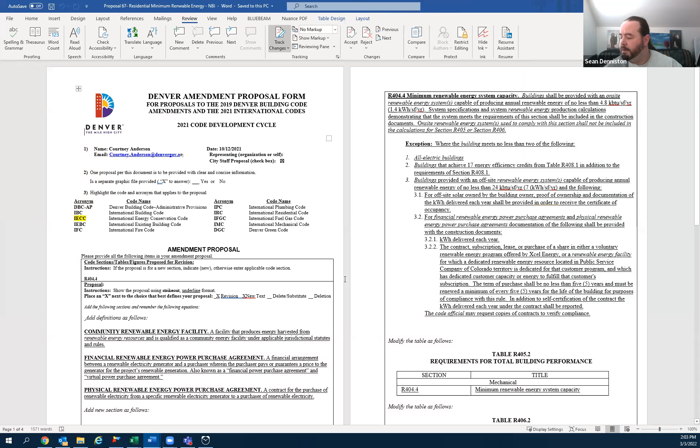And Sean is going to talk about proposal 67. So if you wouldn't mind actually opening that proposal, that might be the best way to do it. All right. So we are having a similar discussion to what we had before. 3 of the big proposals for residential. These are the 3 that we talked about before for commercial. And so hopefully our discussion could be a little bit shorter this time around.

And I wanted to start out by talking about the greenhouse gas emission impact. So this is the minimum renewable energy requirement. This is based on goals that are set and modified through the Denver implementation plan for net zero energy. And it sets a minimum level of on-site renewable energy with an option to do it through off-site instead. The greenhouse gas emissions savings from this would be just over 20%, almost 21% at the level that it's set now. You can see we have the same definitions for off-site renewable that you saw on the commercial side.

So we can go ahead and scroll down. And the structure is very similar to what you saw for commercial minimum renewable energy. The big difference is that since we're really only talking about single family residences on the residential side, we don't need a table, we just need a single target. And so that single target is up in the text instead. And then everything else looks basically the same. It has the same sort of how it has to be able to interact with R405 and R406.

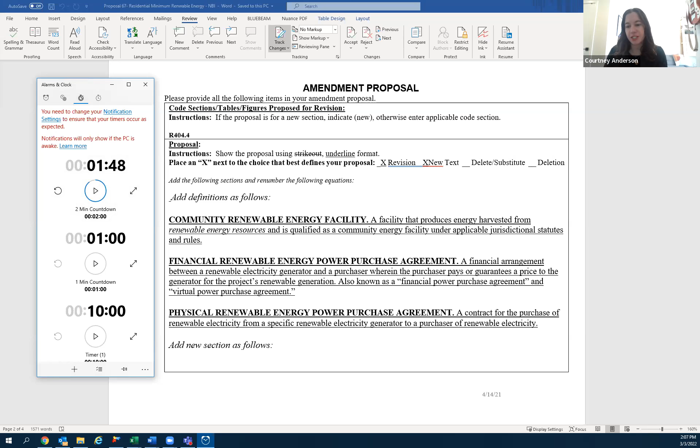Yeah, I was just curious if there was any documentation in the proposal that kind of represented the cost of construction or cost of design increases that are proposed with this amendment. So we do, of course, expect this to have an increase for the cost of construction. Courtney, is Johnny on? He usually has. Johnny's not available for the meeting today. I do have some information about just the Renewable Connect availability, but I was hoping that most of his questions might have been addressed last week.

All right. So we don't have specific... part of that is this is a market where the costs of PV kind of go up and down quite a bit. So it's a bit of a moving target. But we are talking about 20% of annual usage. That's the target range. So that will vary based on the size of the home and kind of the amenities that are built into it that impact its annual usage.

Okay, Nathan, does that answer your question? Your hand's still up, so if it does, go ahead and lower your hand. Okay, it's down. Third and final time, anybody from the community that has a question, please raise your hand. Seeing none, I will go now over to the panelists. So committee members, anybody that has questions on this, again, this is just question time. Please raise your hand. Paul, go ahead.

So I was just curious, with the amount of energy produced per square foot scenarios, was there any consideration to add in an example like, to meet this requirement with a 400-watt panel, this will require 2 panels, something like that? I just put that in there because the builders I work with, and even how my mind works, if I'm glancing at the code to see what that requirement would be, it'd be helpful to have some context to a given sizing of panel. So I throw that out as a suggestion, maybe more than a question. Okay. Next up, we have Elizabeth.

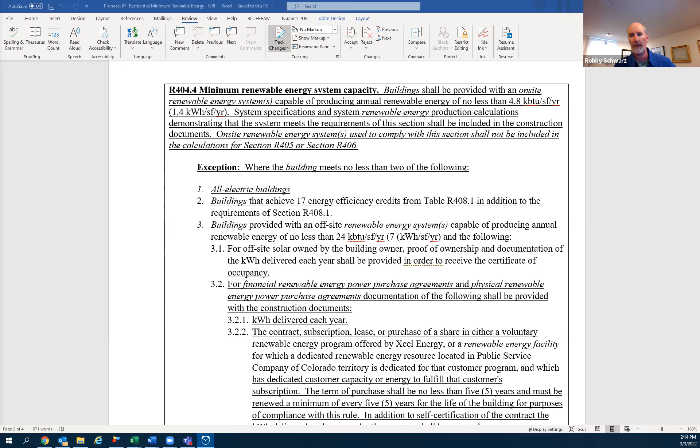So that's one concern. And then it's not clear to me on the proposal if this is just applying to new, and if we're defining new somewhere else, like new residential buildings or remodeled or new project. This is Robby, I might be able to answer that because it's not in chapter 5. It's not being placed in chapter 5. It wouldn't be applicable to the existing home.

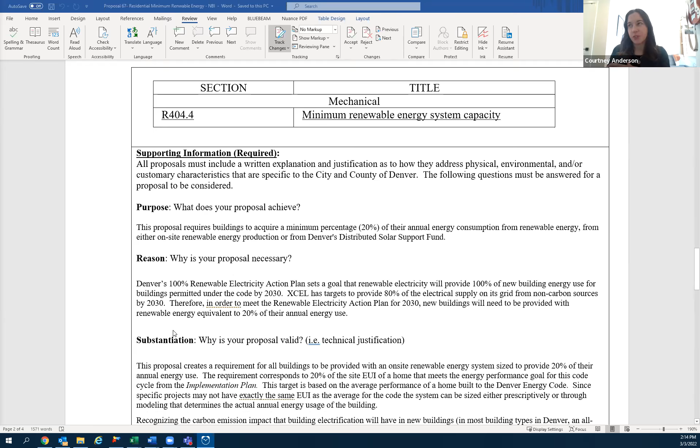Okay. And then can you further explain the statement at the bottom? A Denver Green Code accompanying this proposal is not, that statement. Can you bring that up on the screen? It's way down at the bottom. I can jump in and explain that a little bit. I think the portion you're looking at is saying that there's no accompanying Denver Green Code proposal. In a lot of these that we'll start to see coming up, there is an IECC version, and then there's a Denver Green Code version of that proposal, and we'll hear those at the same time, so we can put the restrictions for the IECC and then adapt the Denver Green Code accordingly. So we're just saying this one does not have one. Good question. Thanks.

Sounds good. And then an example of how this applies would be nice. Square footage, or if there's any project cost size, like budget size, just to consider having an individual homeowner paying for an offsite renewable energy source while electricity prices could continue to climb. So perhaps a project with a larger budget could do this, but a project with a smaller budget, even if it had the same square footage, might not be able to reasonably afford that option. So when you say larger project, you don't actually mean larger square footage, you mean higher end. Because the requirement is based on square footage. So it would scale up and down with home size, but would not scale up and down with home fanciness. Right. That's correct.

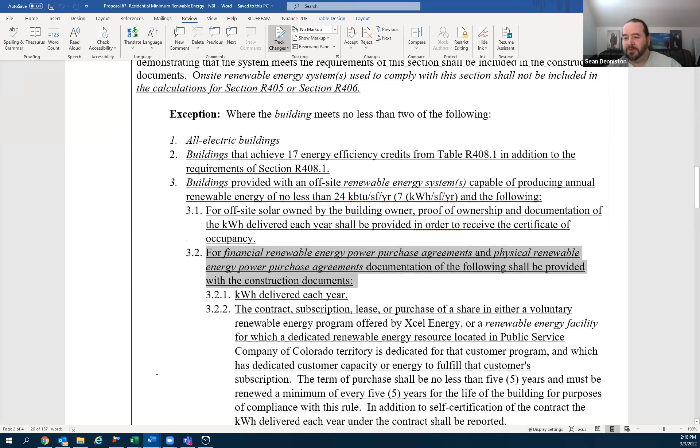So right now, the proposal is blind to ownership of what it looks like on site. And that is a bit of a compromise, because that can get very complicated and very difficult to deal with in the code. Okay.

All right, any other discussion from the committee? This is your chance to really dive into it. I know we already had a glimpse of this last time, but we'll do one last final call. Anybody from the committee have any other comments, questions, or concerns about this? Great. So come next in the residential hearing, you guys will be ready to vote on this.

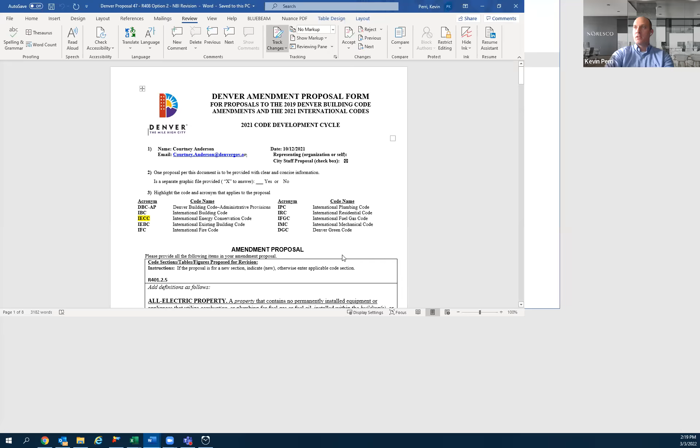All right, so we'll close this one out, and we will bring up item number 47 now. Don, you want to go ahead and start? All right. Giving us a summary. So this is also similar in many ways to what we saw before with C406. However, because this is on the residential side, there are a few very key differences.

Right now, section R408 is a package-based approach. So you pick one out of a number of packages, and that's your additional efficiency option. This is what C406 used to look like. C406, as we discussed last time, has gone to a credit-based approach in 2021. However, in 2021, R408 is still a package-based approach. What this does is it replaces the package-based approach with a credit-based approach. And it does this for a couple of reasons.

One, it allows us to insert a lot more options. It allows us to have much greater flexibility because now you're able to recognize that different options deliver different levels of energy efficiency, and you can actually do multiple options to get to the goal. It leads to greater consistency in the outcomes, because now with a credit-based approach, all the projects will be shooting for the same level of efficiency, as opposed to choosing one package that exceeds the 5% target that was built into the package approach, but then some of them actually deliver more like 6 or 7%.

The savings for this are all based on modeling that was done based on the national prototypes for residential buildings, for single family homes, run in Denver's climate zone, with Denver's weather files. We used 2 prototypes for this. One was a conditioned basement and one was a crawl space. Those 2 were averaged together. We heard from the city that construction in Denver is about a 50-50 split between those 2 typologies. And so we used those 2 national prototypes, and then we modeled all of these options in to see what the impact of them is.

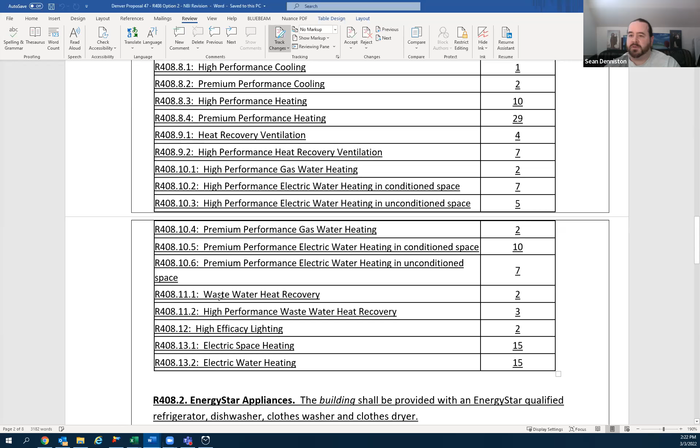Right now in the prescriptive path, outside of moving to a credit approach, the only way to really ramp up the stringency of the code is to insert more mandatory requirements. But that, of course, means that the code is going to be less flexible. There are fewer ways that you can get to that level of performance. And there's limits to the number of packages that you can require in the package approach. So this credit approach allows the prescriptive path in the code to still be viable with the performance levels that Denver is targeting.

And you will notice that there are 2 targets in this. This is also similar to what we saw in C406. A mixed fuel building would be going for 18 credits, which brings that mixed fuel building up to the performance level that the implementation plan has for the code this cycle. And then the 3 credits, again, recognizes the greenhouse gas advantage of moving to an all-electric home. And 3 credits is equal to basically what the package approach delivers under 2021. So this ensures that even an all-electric building is just as efficient as an all-electric building built under 2021.

If you scroll down, yes, so right here, this is also very similar to what we saw in C406. I mean, we tried to make this as much like C406 as possible in its structure, because while there may not be a big overlap between the markets that use these 2 parts of the code, there is some, and that consistency should help with understandability, usability, and enforceability.

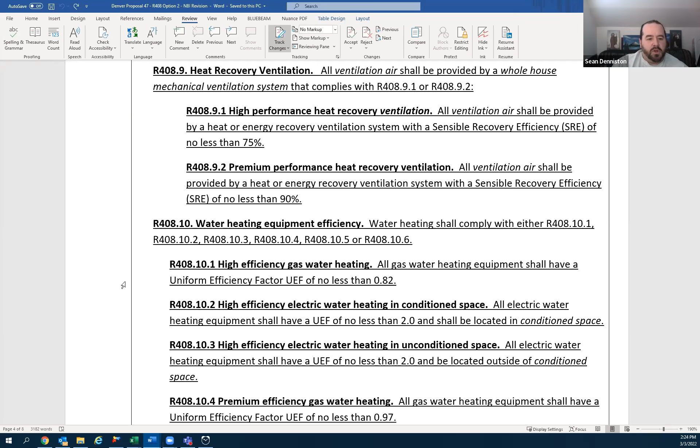And the last thing to note about this is that the credit values are based on percentages. Since this is a little bit of a broad approach, capturing interactive effects between measures is a little bit of a challenge, because you don't know what combination of measures people are going to use. So in order to address the reality that there would be interactive effects, the calculated savings for each measure is not actually calculated from 2021.

It's calculated from 2021 with more efficient space conditioning and more efficient water heating, the 2 packages in 2021 that we figured would be the most common. So that just effectively derates the credit value for each measure, so that we account for those interactive effects as well as we can with an approach like this. And I think that covers the broad sense.

I did want to mention that the greenhouse gas savings that we would expect from this is about 14%. And that has a couple of really important assumptions that interplay with our R406 proposal. That's assuming that under the next edition of the code, half of the projects would go through the prescriptive path and half of them would go through the modeling path.

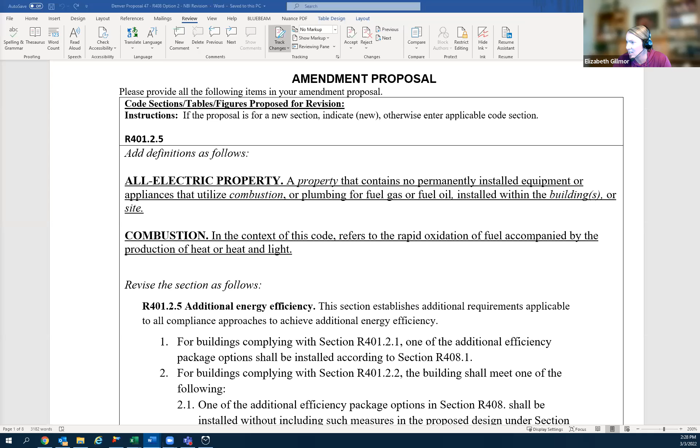I have a handful of questions, just as to how an electric building falls in versus a gas building or mixed fuel building. And some of these I'm still wrapping my mind around, honestly. So maybe just look at high efficiency electric water heating in unconditioned space, which is R408.10.3. I'm not sure I understand that. Is that saying that the water heating equipment is not permitted to be in conditioned space?

It's saying that the savings for high efficiency water heating, which is a heat pump water heater, is different if it's in conditioned space versus unconditioned space. The efficiency of the system goes down, but you're not scavenging heat from the conditioned space, so the usage goes up. So there's some interactive effects that occur.

So we modeled them separately, and one assumes that a heat pump water heater in an unconditioned space would either be in an unconditioned part of the basement, most likely in a single family home, or in the garage. Neither one of these, as we understand, is very common in Denver right now, but we wanted to allow for that possibility. So really, depending on where you put your heat pump water heater, you would have a different number of credits available to you.

And so my understanding is that if you don't put it in conditioned space, you're allowed to have the efficiency be worse? No, the efficiency of the equipment requirement is the same, but the amount of savings that the equipment delivers is different based on whether it's in conditioned versus unconditioned space. So even though a heat pump water heater is scavenging heat when it's in conditioned space, the impact on the efficiency of how it runs is enough that you actually have more savings overall than if you would put it in an unconditioned space in a climate like Denver.

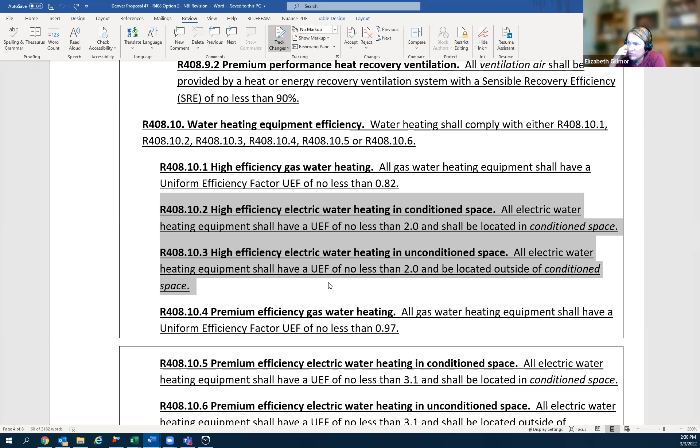So under 408.10, there's 3-4 different things here about high efficiency electric water heating. There's 10.2, 10.3, 10.5, 10.6. Those aren't valued different point-wise, are they? If you look at them, they are. Oh, I see. So those are each individual. Mhm. I see. Okay. For some reason in my head, I was thinking 408.10 was just the same amount of points. I see. Okay. Thank you.

That helps a bunch. And I'll preemptively answer this question since it might come up. Anytime where there is an electrification option, the language in C406 lets you know that if you're an all electric building, you don't get to use these options because you're already getting the credit for being all electric.

Okay, any other questions, comments, or concerns from the committee? This is your final opportunity to do that before we go vote on it next residential hearing. Okay, seeing no more hands up, we will go to the, oh, I do see a hand. Chuck, go ahead.

So I know there's other proposals about electrification. If those pass, would this have to be modified? If those passed, then those options would just need to be taken out. Yeah, this whole thing would need to be modified. And then I think the committee would have to think about how those interact with all electric, because those two proposals from SWEEP are specifically about space heating and water heating, but they don't actually require all electric buildings.

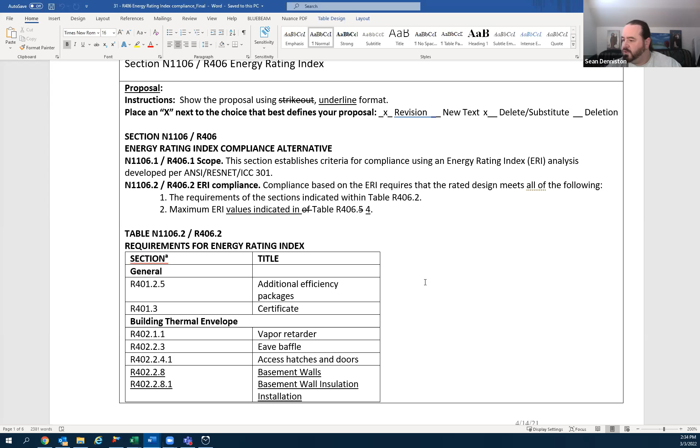Yep. So we'd like to start by highlighting that you saw this before, but you might as well just consider this a new proposal at this point. It's been reworked based on the discussion that was had before. So try to think of this as a new proposal. This proposal does 2 basic things. One is that it cleans up R406 just to make it work better, and Robby's going to talk to you about how it does that. If you could scroll down to where it actually talks about the energy rating index.

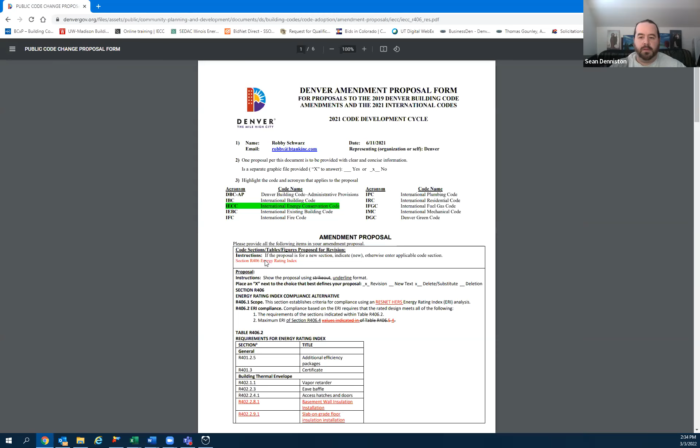The other thing that it does is it calibrates the ERI target. Scroll up just a little bit. Calibrates the ERI target to Denver's goals. It appears that you're not showing the revision. Oh yeah, this is the old version of it. It's correctly linked on the Denver website. It is. Yeah, zoom in just a little bit there.

So the ERI target of 50 is set in the implementation plan. One of the things you will notice here is that there's no discussion of a target with or without on-site renewables, because the goal for on-site renewables is set in the other proposal, so we're able to consider those separately. For this one, all that is needed is what you might consider the efficiency goal from the implementation plan, which is the ERI of 50. And because of that, we can get rid of the table and just have the 50 right there in the text.

And it still does allow for a limited amount of additional renewables to be included in the ERI calculation. This is something that was already in 2021, that you could use up to 5% within your ERI calculation. We've maintained that just to maintain some extra flexibility, but really want to emphasize that because of how the other proposal is structured, any on-site renewable that you use to meet the minimum renewables requirement wouldn't be able to be used here toward the ERI, and it would be capped at 5%.

This basically protects the building from trading off too much of its efficiency with renewables. So it ensures basically a backstop for the efficiency of the building. It's very straightforward to do it this way. Like I said, the target comes straight out of the plan. The greenhouse gas impact for this is very similar to what we would see for R408. It's right there in 13–14%.

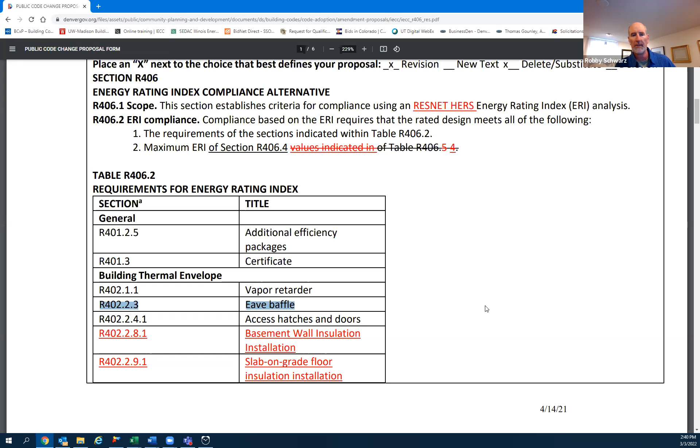So there are some other things that were left out of this table, and those are in red and underlined here, that are being added into this table to ensure parity between the different compliance pathways. All of these things only deal with how you install something. They don't deal with R values or U values that could potentially be traded off.

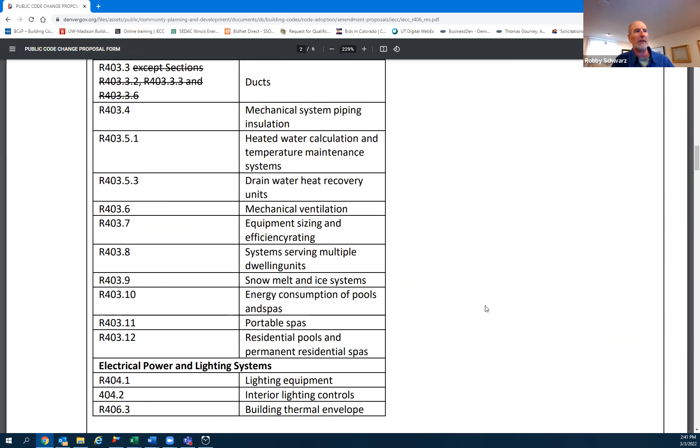And to be clear, this same proposal for that table has been introduced in the 2024 IECC code development process and has been accepted at that level as well. So you're going to be ahead of the game a little bit here in Denver. Moving down there, we also in section R406.4.3 added some unusual language that works well at a local adoption process, but doesn't work so well on a national level adoption process.

And that's the language that's underlined there that says the most recent publication of the ANSI 301 standard. The reason that's been added is because the ANSI standard for how you develop an energy rating index score is a continual maintenance standard. In order to have good alignment between the HERS energy rating index that builders are currently using and its use in the code for compliance, you want to make sure that there's alignment there so that when or if the standard is updated,

RESNET gives a six month or year-long transition period, and that same transition period will be utilized for compliance with the code. So there will always be consistency in that energy rating index that is used.

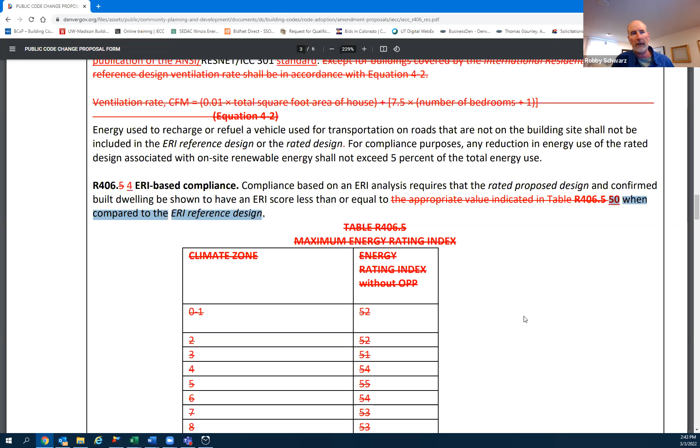As Sean said, the score and the table has been changed so that we're just referencing the energy rating index of 50 now in R406.4. And then the rest of the document is based off of the current 2021 IECC, just the numbering, some numbering has changed there. But what's new in the 2021 IECC in this pathway is that you have to submit a proposed energy rating index compliance document for the permit submittal.

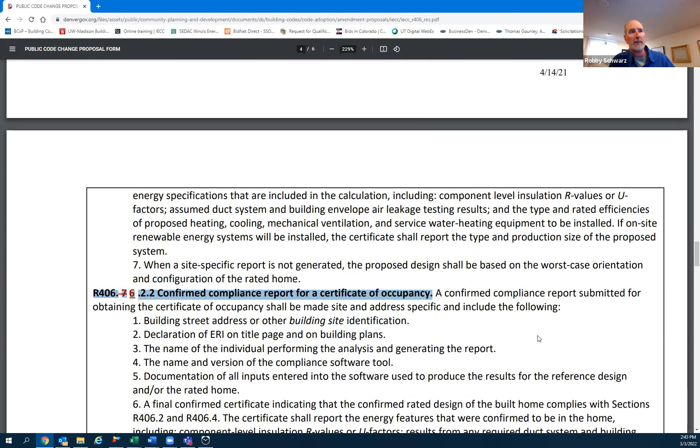And then you have to submit a confirmed energy rating index application as part of the documentation to get your certificate of occupancy. So this language just really mirrors the language that was in the building performance pathway, the simulated performance pathway in the past there. So I think that explains the changes. And if you have any questions, happy to answer them.

Okay, thanks, Robbie and Sean. I will turn it over to the general public. Anybody from the general public that wants to speak with a question, comment, or concern, please raise your hand. And finally, anybody from the general public that has a question, comment, or concern. I see one. Nathan, you'll have 2 minutes. Go ahead. How's it going?

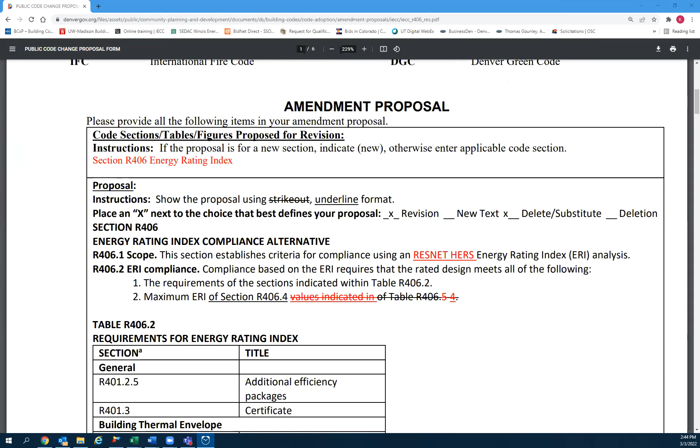Yeah, I'm going to sound like a broken record, I'm sure, to some of you, but obviously house costs are always pretty sensitive to the builders in the group and consumers as they're trying to buy houses. And I was looking through, and I think, Robbie, you checked the box on here that says no impact or no increase to construction costs. I was going to see if maybe you could talk to that a little bit on how you can get a 10% increase in energy efficiency without an increase in house costs.

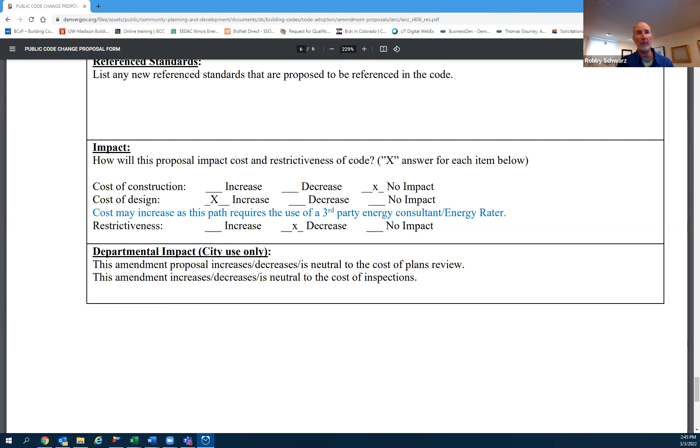So that's based off of the current iteration of the R406 energy rating index pathway in the IECC as written. So it's using the code-based ERI index score, and it's much more restrictive than this approach is. So that's where that no impact is coming.

So the score of reaching 50, on a regional level, the average index score is somewhere in that 50 to 55 range in the Colorado Front Range, according to RESNET data. And so it shouldn't impact. There might be a slight impact, but I put down no impact in the construction. Really what we're trying to do is get this pathway utilized more in the construction process for demonstrating compliance. You're going to have to meet the 2021 IECC requirements regardless.

Okay, Nathan, any other questions? You have a few moments left of your time, if you had any follow-up questions for that. So the other paths would go away, correct? And this would be the only path? Not in this code cycle. Okay. That it's a potential in the future, but it hasn't been decided, if that would be proposed. Okay. All right, thanks, Robbie.

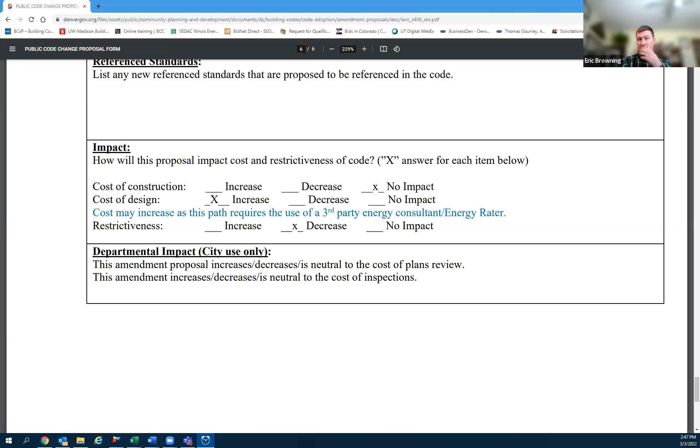Robbie, so specifically with respect to R406.3, which is the Energy Rating Index, and the reference standard that you were speaking to, the ICC ANSI RESNET 301, you were making some comments about what I believe was the necessary coordination between the ResNet and the standard, and the language that's been proposed as a revision here that reads the most recent publication of is likely problematic from a legal perspective in terms of the city and county adopting theoretically standards that have not yet come into existence.

For example, a 2022 or 2023 edition of this standard. We really can't adopt something that doesn't exist because, quite frankly, we don't know what we're adopting. So right now, the IECC references the 2019 edition of the standard. And my question is, what problems or conflicts would be created if we were required to stay on the 2019 edition of the standard until the next code cycle when we updated the IECC language?

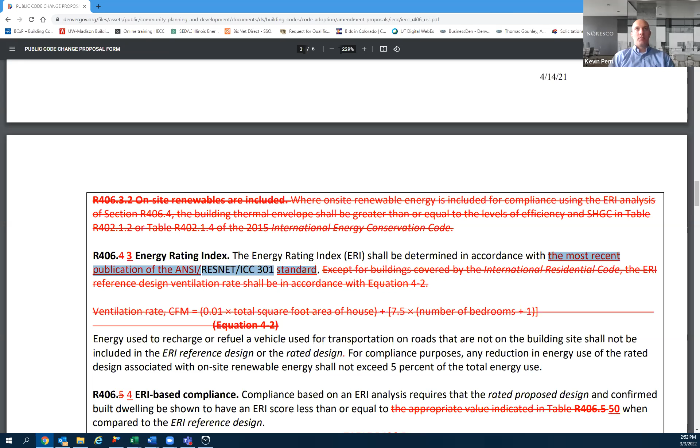Sorry, I was hoping I could get a little help understanding section 406.6.3, where we're addressing renewable energy credit documentation for the on-site renewable energy system, and what the intent of that is. I know only about 5% of the solar can be used for this, which might make this a moot point, because I don't know that it's going to make a meaningful impact on the HERS score. But I was curious about the reasoning behind this section.

Sean, feel free to jump in, but my understanding is that the renewable energy credit has a financial piece to it, and they just want to ensure that that credit goes to the right individual. And so there's a requirement for the software tool to be able to calculate that and report it.

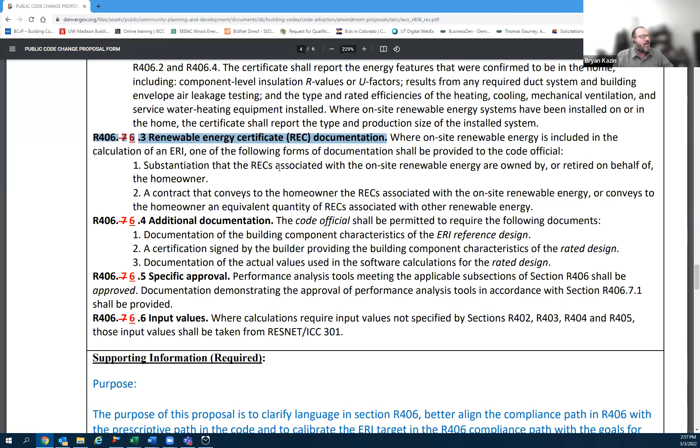A way to clean that up might be you can permit the current edition to be used, but not require it. So you pick an edition to adopt and then permit a more current edition to be used. Because I understand the issue with not having software that can go back to an older code to meet the requirements. So that might be a way to clean that up, is to permit it. Okay. Thanks for that insight. Great. Thank you. We'll follow up on that. Jamie, your hand's up next.

This is to Sean, I guess, how do you prevent the owner from later on signing up for Xcel Solar Rewards program? So it's a little bit self-policing. Most of those financial arrangements where you sell off the RECs, you have to agree to give them up before you get your PV panels. So if someone finds a creative way to sell off their RECs after they've got their certificate of occupancy, there's really nothing that the code can do about that.

However, the market realities of trying to sell the RECs of your own PV panel on your home as a private seller are pretty cumbersome. In fact, there might be a way to do it, but I'm not aware of a way to do it. So I think that if that is a concern, it's a fairly fringe concern that the code probably doesn't need to try to bend over backwards to address.

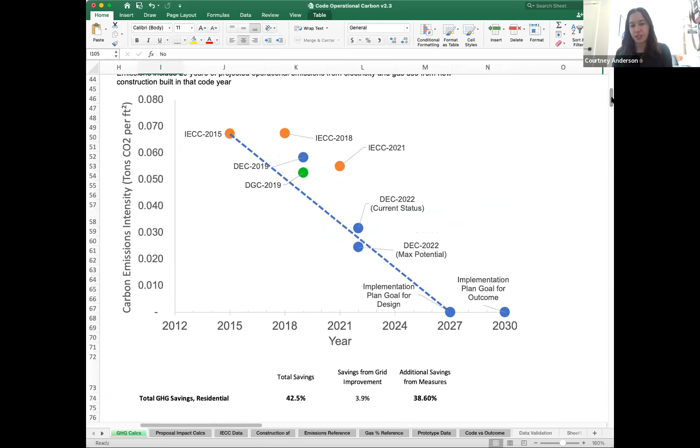And Sean, just to clarify, you said the three proposals we just talked about today would get us to that current status? Yes. Okay, so that does not include the electrification suite proposals. Right, so if I include the other big ones, the two partial electrification proposals, you can see that it shows us below the line.

However, I want to give a little bit of a caution because there's a bit of an overlap. Since the partial electrification would result in efficiency, basically the efficiency proposals R408 and R406, the savings from those would need to be adjusted just so that we're not double counting those efficiency gains. And so that might move that dot up. But we can see that we do start to get to that goal with all of them, which is not something that we thought was going to happen before.

So that's all I wanted to show there. And I think we can move on to the next thing. Okay. So next item of business will be F45. And that is Michaela. Michaela, I am bringing you over to a panelist. So if you want to turn on your video and give us a rundown of your proposal, that would be great.

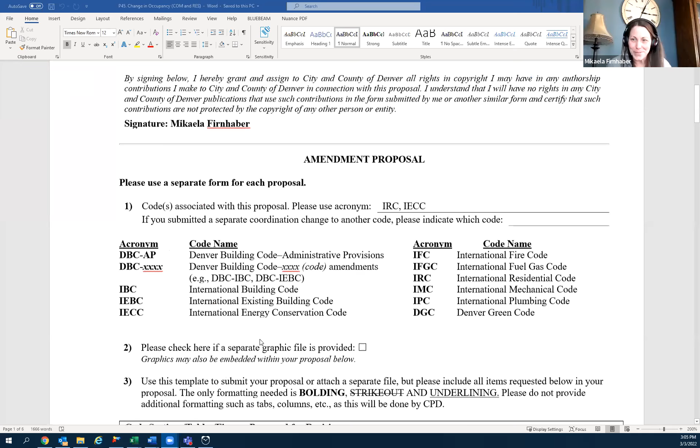So when you move people from audience to panelists, they lose all connectivity and can't hear what you said. So if you're ready for me to present, I'll go ahead. Yeah, exactly. Great. So this, sorry, move some things around.

This proposal is to address change of occupancy for residential structures in both the IECC, IRC, and the residential provisions and commercial provisions of the IECC. So in Denver, we promote the reuse of structures, and with the current provisions of the IECC, we have found that applicants run into a lot of roadblocks with reusing structures and adaptive reuse. That happens quite often when you are moving from a commercial structure to a residential structure. So examples that happen quite often are from a church to a new single family dwelling.

In our previous amendments to the commercial provisions of the IECC for change of occupancy, we had incorporated a table, and if you don't mind scrolling down to the table, that outlined the energy demand categories for different IBC occupancies. And this allowed that if you had a B occupancy structure within the IBC and you were changing the occupancy to an R occupancy, we would consider it the same energy demand category. It wouldn't necessarily require you to comply with the entire IECC, in some instances having to bring everything up in terms of the thermal envelope, duct testing, et cetera.

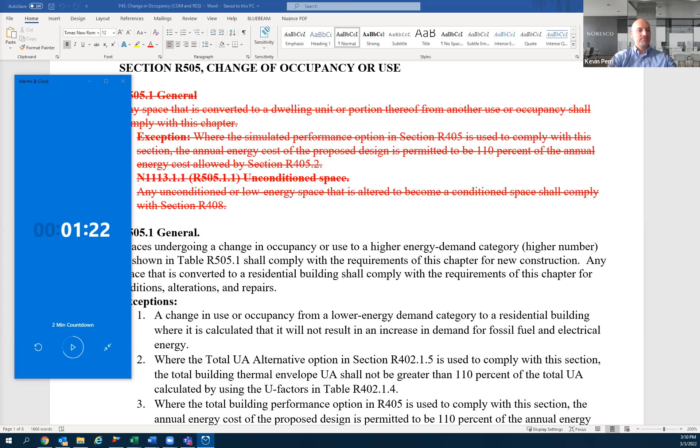Committee, this is your time to ask questions of the proponent. Anybody from the committee that has a question, please raise your hand. Anybody? Mark, your hand's up. Yeah, I just have one simple one. When would the opportunity present itself for a change in occupancy for new construction? Or am I misreading the first sentence? All right. Can you clarify which first sentence you're referring to?

Under R505.1 general, spaces undergoing a change in occupancy or use to a higher energy demand category, a higher number, as shown in table R405, R505.1 shall comply with the requirements of this chapter for new construction. So my question is, when would a building be under new construction but have a change of occupancy? Yeah, so I read that sentence differently.

So what that sentence is trying to say is existing building, it's changing the use of the structure. So a great example of that, let's just do a church to single family dwelling. And what this section is saying is, in those instances, if it went to a higher use demand category, that entire structure has to comply with this code for new construction. God, that makes sense to me. So maybe I'm proposing that for new construction is substituted for additions, alterations, and repairs. Right, because that's an alteration to an existing building.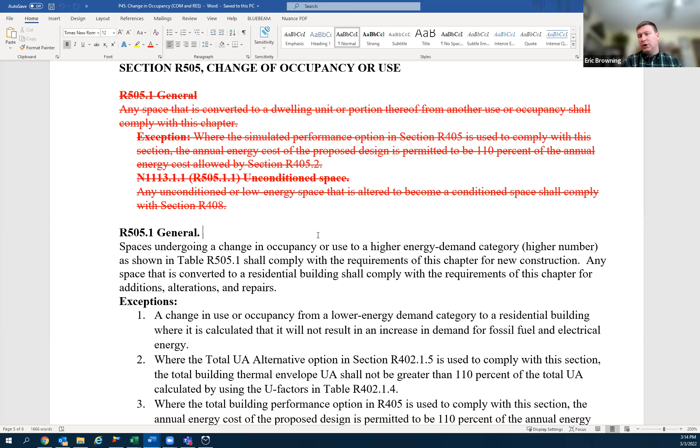Any other questions from the committee? Eric, go ahead. Yes, thank you. Michaela, would you be open to committee amendments that recognize IRC uses that would, from an existing perspective, be something other than energy demand category 2? For example, if we have an attached or detached garage or an accessory structure, that doesn't seem like it would fall in category 2 at this point. Would you be open to a friendly amendment?

Right, I see that perspective, that maybe detached garages or some accessory structures that are really incidental might necessarily fall in the lowest energy demand. I think we have to be extremely careful with how we draft that, and be very clear that it's accessory structures that do not contain living space. We recently passed on the IRC committee a proposal that clarified some of the uses in IRC structures that address some of those accessory structures with living space. But I absolutely understand that.

I also can see how we can get there with this, how the amendment is drafted to enforce on those structures, because they're likely undergoing other alterations if it's a garage to, say, an IBC occupancy with higher demand.

Okay, any other questions? Chuck, I saw your hand go up, but it went down. That's fine if you don't have a question, but it went back up. Go ahead. Yeah, so I'll just add to Eric's comment, because it was a discussion we had earlier talking about detached accessory structures or structures that are not conditioned.

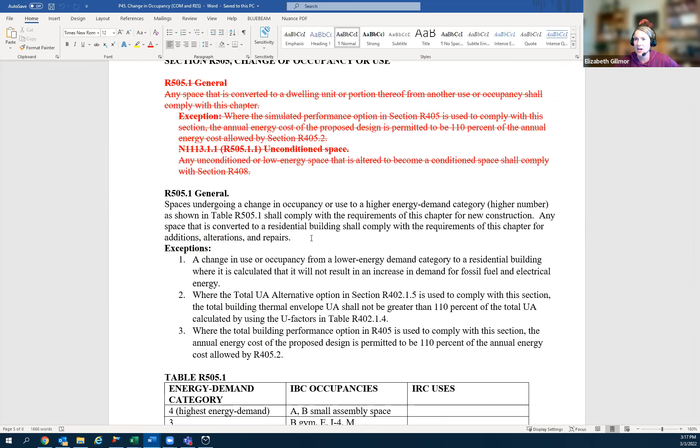I don't find that the language matches. Yeah, it's just that section 5 has to do with existing buildings, which is just a different set of rules than new construction. So what her language here is saying is that if you trigger the requirement that your structure is going to a higher usage, you can't use the section for existing buildings anymore, and you've got to go use the new construction section.

There is a bit in section, I want to say it's R503. Oh, code people, help me out. Maybe it is. Sorry, you know what? I'm looking at 2018 IECC. Sorry about that. But essentially, this is an alteration. If you're altering an existing building in a way that you can't say that the energy use is the same, like if you're increasing the energy use because you're going to a higher energy demand, you can't use the alteration section anymore, and it pushes you into new construction.

Yeah, I think I'm understanding the intent. I just don't necessarily feel like the language is supporting the path. That could be confusing. I guess that's what I'm just pointing out. If you guys think it's clear, then I'll drop it. Yeah, we have something similar in the commercial section of the code. And in the last code cycle, there was similar clarification added, because in the current code, it's really vague about, well, if your alteration doesn't increase your energy use, then you can use this section. Well, how do we know that it doesn't increase the energy use? So in the commercial section, that was amended to define what is an increase of energy use. So hopefully it makes it clearer.

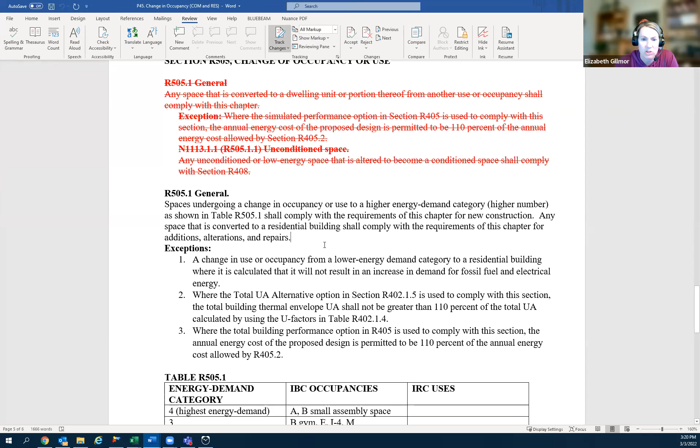So I don't know if we want to add even a couple words that might help to clarify that. Oh, sorry, I just lost my place in this code. There it is. Sorry. Maybe it's the, any spaces undergoing a change of use to a higher energy demand category, blah, blah, blah, shall comply with the requirements for new construction instead of the requirements of this chapter. That's a totally different meaning now. But now I think it's more what you're talking about.

But yeah, so shall comply with the requirements for new construction. That's kind of what you've been talking about, right? I believe that's what we mean. I mean, technically, this is a section in a chapter, but does it make better sense if we just say shall comply with the requirements for new construction? Does that make more sense?

It's kind of funky language, right? Because technically it's the chapter, but it's the section, I don't know. Or maybe, well, let me back up. Sorry, was this Michaela's proposal? Yes. I've got too many things open on my screen now.

Sorry. Michaela, is the intent that it kicks you over to the new construction code altogether? It takes you into the provisions of the IECC for new construction. So would it be better to remove those 3 words, "of this chapter"? I believe "chapter" clarifies that you were still speaking to IECC and to the new construction section of the IECC. And then further below, I think there's another sentence I add that has to comply with this chapter also for additions, alterations, and repairs.

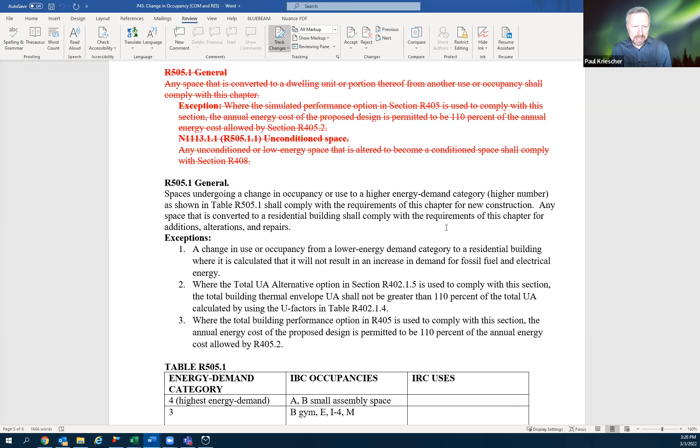Hey, folks, I'll just ask a separate question. Just curious how the energy demand categories are created in this. I think it's probably coming from the commercial code, but can anyone explain how those come together, what they mean? A question for me or for other members? Sure, anyone who's capable. If you want to answer that, go ahead. But we do have Robby, our subject matter expert, on the line as well, so if you want to defer to him, that's fine too.

Yeah. So these energy demand categories were created to follow the table for hazards that exist in the International Existing Building Code. And that was done in the previous amendment cycle through the committees for the commercial provisions.

Robby, you're on mute if you want to chime in. Yeah, sorry. I was wondering if I could ask a follow-up question. So it's just saying that the energy demand is greater, but it's not quantified in any way. What that actually means, was there an intent to link it to being more energy demand than the structure was before it was altered, or anything like that?

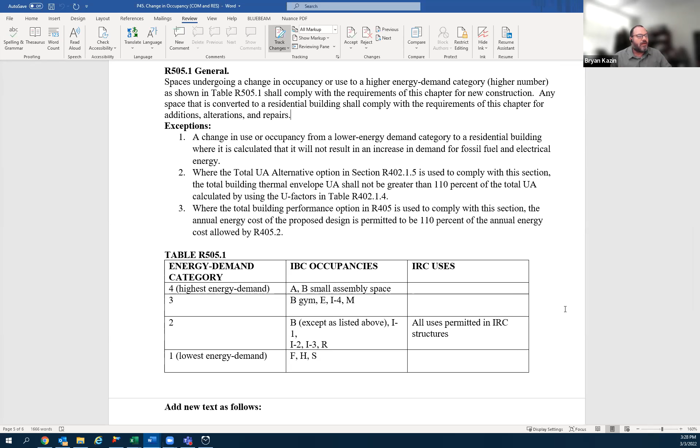Back to that R505.1. This is kind of directed towards Michaela, Elizabeth, and Mark. If you reverse the order of those two sentences, I think it reads a lot better and it makes it a lot clearer. So basically the first sentence would be: any space that is converted to a residential building shall comply with the requirements of this chapter for additions, alterations, and repairs, and then go to the first sentence. I think it makes it a lot clearer. And then you don't have to rewrite anything, just flip those two sentences.

Okay. Bryan, something to consider if someone wants to make a motion. Any discussion or motions? Elizabeth, go ahead. Yeah, I liked Bryan's suggestion too. I'll make a motion to approve with the intent to modify. Did I do that right? Yep, go ahead. Okay. I like it. I'll second that. Never remember how you do this. And my proposal to modify would be to swap the sentences as Bryan suggested and to remove the words "of this chapter" before "for new construction."

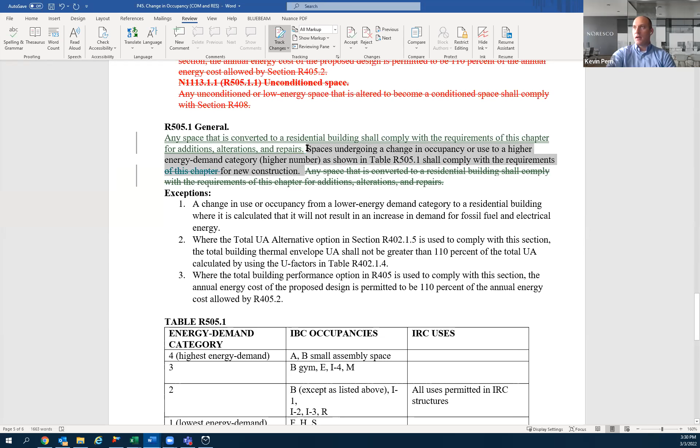Okay. And Mark, I believe that was you that seconded that motion. Is that correct? Okay, got a thumbs up. Kevin, all of that should be underlined, because it's all new. Everything in terms of the proposal. Yeah. Okay, that's fine. We can do that. That was just how the proposal was written, so we'll do that. Technically, Michaela, I can't go to you, so I'm sorry.

Any discussion from the committee? Okay, seeing none, there is a motion. Charlie, I'm going to come to you for a roll call in a minute. There is a motion to approve with the intent to modify, and those modifications are on the screen there, and there is a second. But before we vote, now that we're in the voting section, we want to take a roll call, see if we're missing anybody, and see how many voting members we have. So, Charlie, can you help us out with that?

Yeah, definitely. So as of right now, I have 22 committee members accounted for, but I'll quickly run down the names. I'm sorry if I missed anybody that's here, but the names I don't have accounted for are Carol Pafford, Chris Parr, Chris Spelke, John Burns, Curtis Underwood, John Dutch, Linda Morrison, Nathan Kerr, Shanti Plas, and Chuck Kusher. Okay, I don't see anybody raising their hands on the public side with a call-in number, so we'll stick with 22 voting members.

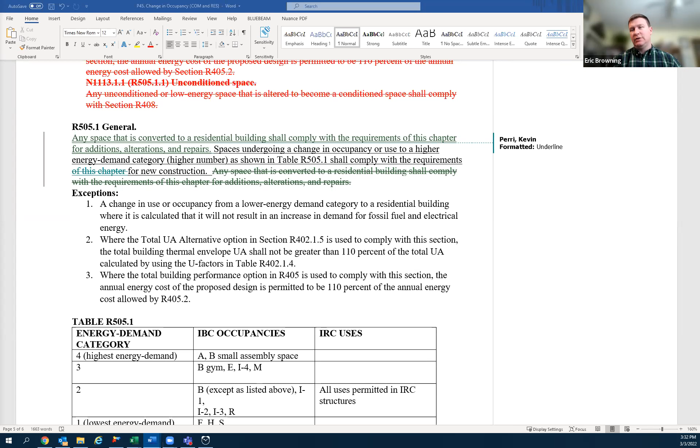I've got some helpful information. Just noting that the chapters are different in the IECC and the IRC. It's chapter 11 in the IRC and chapter 5 in the IECC. So it should refer to the entire IECC, not just the buildings chapter. Okay, so are you talking about this sentence that we modified? Yes, let's see. Sorry, it's a little small on the screen.

So I think what it needs to say is "of this code," right? The requirements of this code for new construction. Yeah. So I will propose that as a friendly amendment.

Kevin, I can't hear you. Please. I would accept that as my second. Okay, thanks. Sorry, I was muted. Thanks. You guys took care of it for me there.

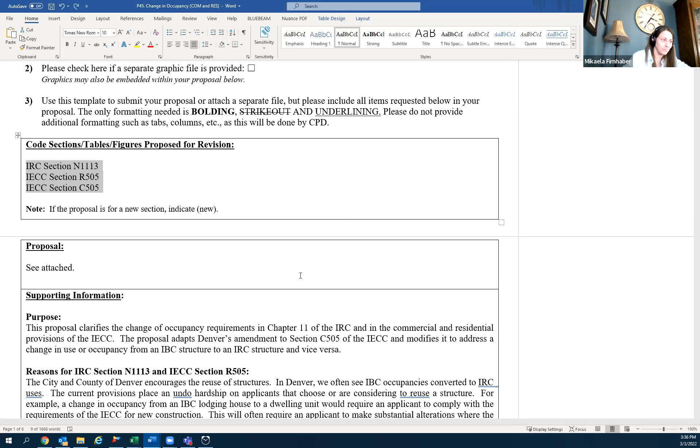Great, thank you. Okay, with that being said, there still is a motion on the table and a second. I will allow for any more discussion because we had a little bit more feedback there. Anybody that wants to have any discussion, again, if you want to propose an additional amendment or change to Elizabeth and Mark, you can do so. If I don't see any hands, we'll be voting on what was already changed. Okay. I'm not seeing any hands. Hopefully everybody understood what Mikaela was talking about there. So we will call for a vote then.

All those in favor of approving this proposal with the intent to modify, and those modifications are on the screen, please raise your hand. And Kevin, are we voting to approve the modification and the amendment, or just the modification? Since the motion was to approve with the intent to modify, we are voting for the entire thing. Okay. So we're voting on the change, and we're also voting on the approval of this. Just some clarification there. So all those in favor, keep your hands up.

I'll give it a second here. Okay, I have 16. Go ahead and lower your hands. All those opposed, please raise your hand. 1. Go ahead and lower your hands. And all those abstaining, please raise your hand. Five. Okay. So this passes with those changes.

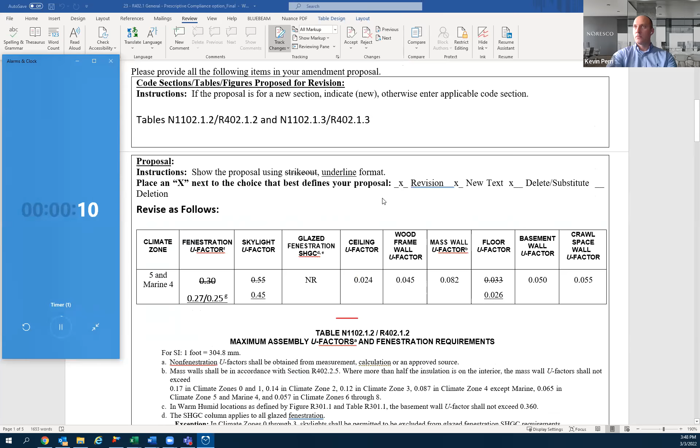All right, welcome back. Robby, you have the floor for the rest of the proposals here. So we are on number 23. If you can give us an overview of this proposal, that'd be great. Thank you.

Yes, so what this proposal is trying to accomplish is straight efficiency, trying to improve the efficiency in the R value and U value table. So you'll see that there's fenestration U value improvement, and there's floor U factor improvement. And then in the insulation table, there's again fenestration U value improvement, skylight U value improvement, and then floor R value improvement, proposed requirements.

The idea here is basically to improve the requirements where they're easily improved, and where in our climate zone, for example, the floor systems are generally in new construction at least 12 inches thick. So the minimum requirement makes a lot more sense to use an R38 batt insulation rather than an R30, for example, because that batt fits properly in that cavity there.

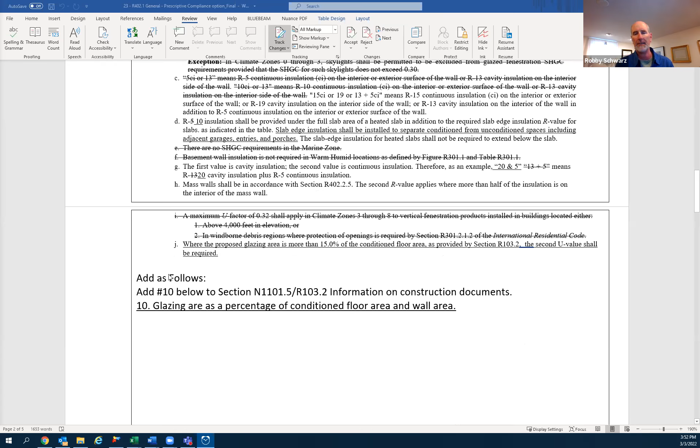This is trying to get parity with the performance path, because in the performance section of the code, R405, there's a reference home built in that code, and that reference home doesn't give you credit really for... it starts in essence penalizing you if you have a home that has a window to conditioned floor area that's greater than 15%. And that's not mirrored in these other pathways. So this is trying to create parity between this pathway and the performance pathways in the code to achieve greater energy efficiency.

And then the last thing that this table does in the R-value section, because that is the only section that deals with slab edge insulation, is to ensure that slab edge insulation, if you're building a slab-on-grade home, is carried around between the connection between the garage and the slab edge and any attached patio in the slab edge, that there's a thermal break associated with those locations as well. So again, this is all about increasing the efficiency requirement.

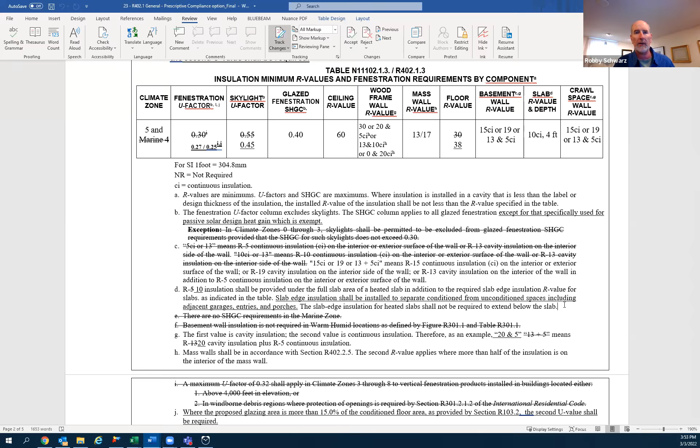And then I guess there is one last section there. There's a section that talks about what's required on your construction documents. And in order to make it easily attainable for plan review, we're asking that we add this number 10 to the construction documents requirements so that the calculation of the percentage of conditioned floor area is already done there. So I'm open for further questions.

Thanks, Robby. We are going to turn it over to the general public first. Anybody that wants to speak in support of this proposal from the general public, please raise your hand. Third and final call, anybody from the general public that wants to speak in support, please raise your hand. Seeing none, we'll go to opposition.

Anybody that wants to speak in opposition of this from the general public, please raise your hand. Third and final call, anybody that wants to speak in opposition of this from the general public, please raise your hand. Seeing none, I turn it back over to you, committee. This is your opportunity to ask questions. At this time only, we will take questions for Robby.

Eric. Thank you, Mr. Moderator. Robby, in order to just kind of clean up this language a little bit in the table and the footnote, instead of having the two values, instead of saying in the footnotes that the second value shall be required, we just change the footnote to just say 0.25. I think that'll just be cleaner, easier to understand instead of having these different values within the table. The impact is the same. Is there any concern from that perspective, Robby?

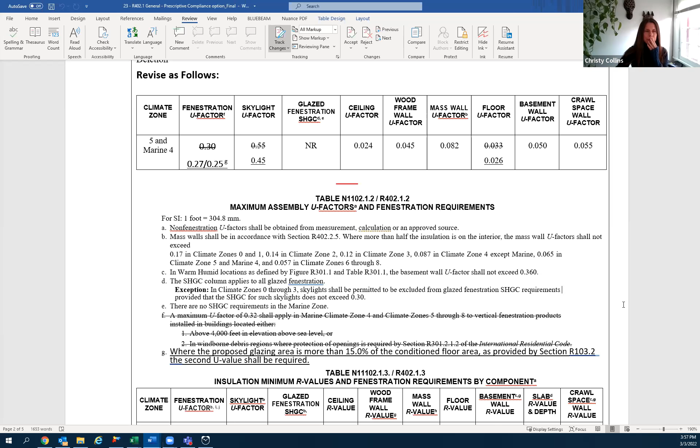I don't. Bill Rectanis or another builder on the committee might have a better idea than I would. Okay, thanks. Anybody from the committee want to chime in on that one? Feel free to unmute. Bill, I saw your hand go up. Do you have a different question or do you have an answer to that one?

I was just gonna, I mean, I'd have to go look. It's obviously on a window by window basis, but it could add up, depending on the amount of windows that you have in the house, to be a significant number. And when I say significant, I mean $1,000, $1,500 a house to go to those higher U values. And like I said, it really depends on the home. Some of the homes we build have 30 windows in them and some have 15. So it's really dependent on size and number of windows in the home, but there is a definite cost impact that will be passed along to the consumer for that increase.

Yeah. Just to add to that comment, or a different perspective, with regards to the lower U value, the 0.25, it is also linked to reducing the number of windows, or at least incentivizing reducing the number of windows in the house so that you don't need to go as low as 0.25. The window to floor ratio is a big trigger for the overall energy performance of the house.

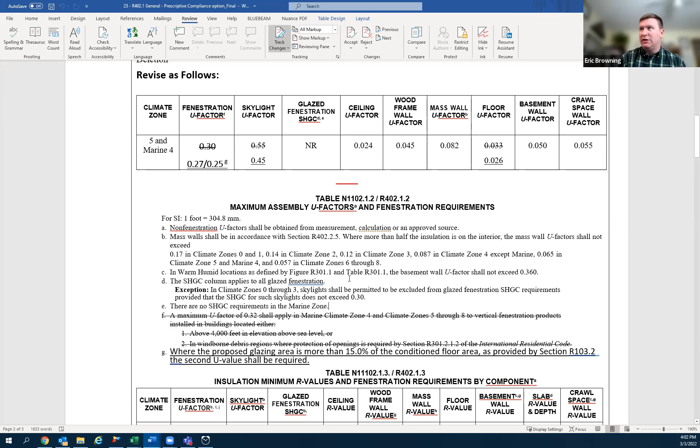Thank you, Mr. Moderator. Just an observation that there are a few coordination and grammatical items that I think need to be taken care of within the specific language. For just one example, in the top table, the Marine 4 was not crossed out, but in the bottom table it was. So it's just a little bit of cleanup. It doesn't change the impact or intent of the application of the code. But I did just want to identify that, and there are a couple other things within the proposal. So assuming that the committee is considering approving this, I would ask that we be allowed to make some of those minor edits to provide for clarity. That's all. Thank you. Sure.

I'll just say one example here. So the footnote is talking about marine and different climate zones. However, in the table, we're only talking about climate zone 5. So that's what I think Eric is trying to talk about there. Any other discussion, or anybody want to make a motion or modification? Courtney.

Thanks. I really liked Eric's point of using the 0.25 in the U factor with a footnote that allows you to use 0.27. So I would make a motion to do that. Okay. Give me a minute while I try to do that while we talk. Give me one. So keeping the footnote, moving the 0.27.

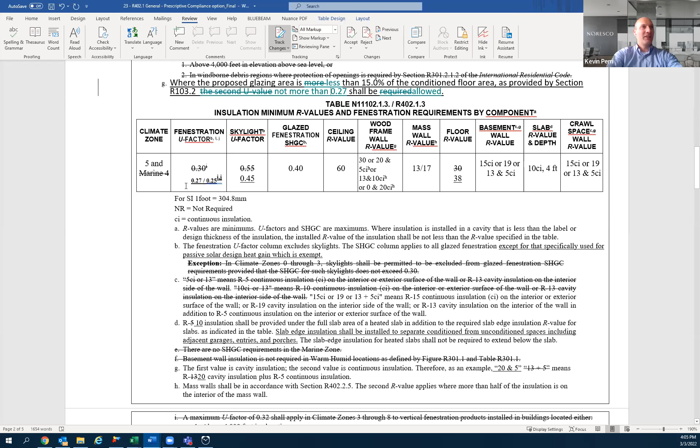Then we would have to make the same change here for this one, I would assume. Yeah. Okay. So I second that for what it's worth. Okay, cool. You might be able to just cut and paste that other one. If it's exactly the same footnote, I am okay with that.

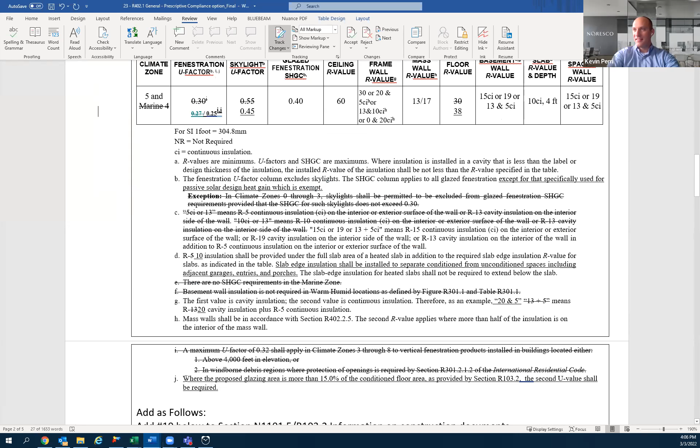And this now is no longer J footnote then, is that correct? Correct. However, there are other footnote numbering edits that need to be made. So that would be one of the things I was talking about. Okay, cool. Understood. All right, Courtney, thanks for that. Eric seconded that motion. Chuck, go ahead.

One of the general edits is the SHGC is in one table, but not the other table. And I think that's a substantial edit that should be approved by committee. Okay, are you talking about these two sections right here? Yeah. Highlighted? Yeah. Okay, just for Robby, for a point of clarification, was that the intent there to have those different?

That is the current structure of these tables in the IECC. So I did not propose to change that, but it could be something that you want to do. Okay, Robby, so just for information purposes for the committee, can you explain the differences from the upper table and the lower table then? The upper table is based off of U values or U factors, and the lower table is based off of R values.

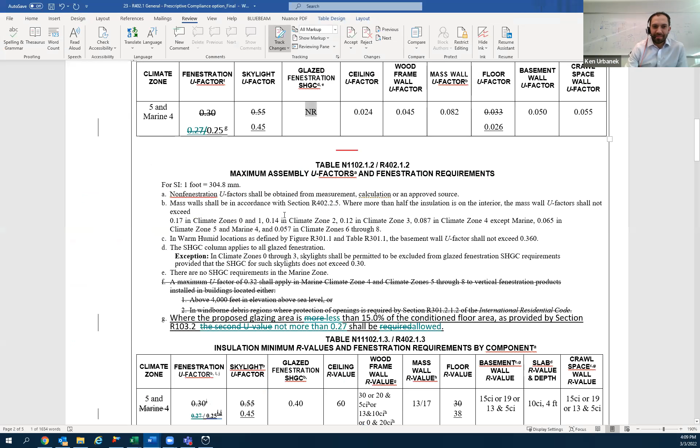Yeah, the currently published version on ICC's website, including the errata, does show it as 0.40 in table R402.1.2. So my recommendation would be to match that with the 0.40. Okay, Courtney, are you okay with that? Yeah, definitely. It's not a change really, in my opinion. Okay, good. Sure, just making sure. All right, next up is Elizabeth. Sorry, I was just going to chime in on that, but I'm all good. Thank you. Okay, Alan, you're up next.

Yeah, for the revision to footnote G, I'm looking at other footnotes where it reads "where the element U factor shall not exceed." Should that language be lined up more to relate that? So maybe "fenestration U factor shall not exceed 0.27" versus the way we have it written now. It seems to me like it might align more with what else is in the code. Yep. Like that, Alan? Did we capture that correctly?

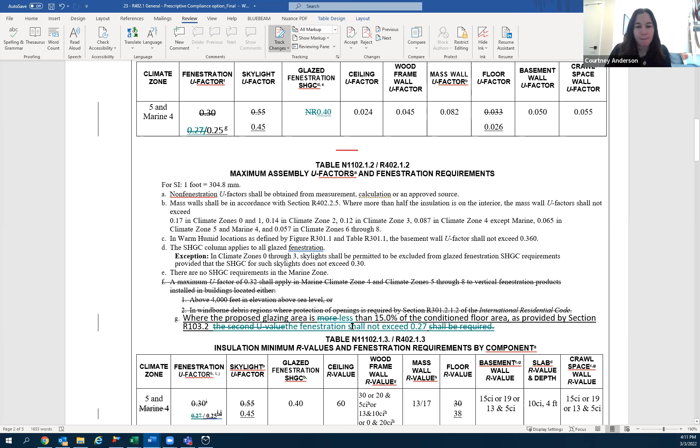If you look at footnote C, how it reads, "basement wall U factor shall not exceed." I think you could put "fenestration U factor shall not exceed 0.27." Courtney, are you okay with that? Okay, and Eric already agreed. Okay. And then you could just remove that second part after 0.27. "Shall be," yeah. Okay, any other discussion?

Seeing none, there is a motion on the table to amend this. And so we're going to vote just on the amendment portion, since that's the motion there. And what we changed, just for reference, is the glazing fenestration number up here, and then two footnotes to be exactly the same for the upper table and lower table. So we're voting on those amendments to this proposal. All those in favor of that, please raise your hand.

Okay, I have 18. Go ahead and lower them. Did have one person drop out. Right. I'm going to lower your hands. Okay, all those opposed, please raise your hand. None. All those abstaining, please raise your hand. Okay. 1, 2, 3. Okay. 18-0 on just that amendment. Okay, moving forward. Oh, Brian, did you have a question?

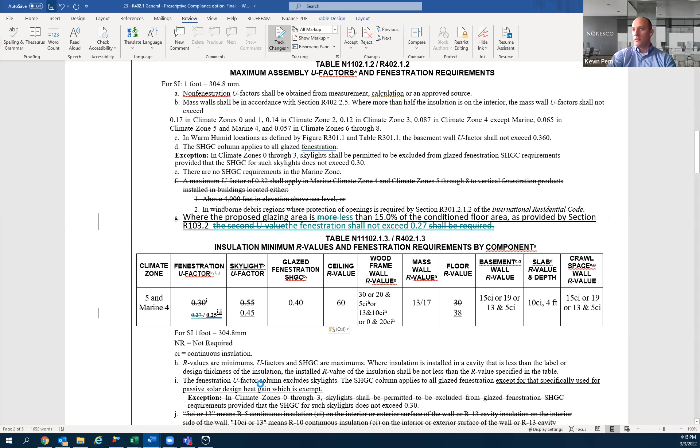So this passes 18-0. One other item of business with this is that since there needs to be a subcommittee to help further fix this, anybody want to be a part of that, please raise your hand so Charlie can write that down for you. So Eric, anybody else? Alan, anybody else? Okay, so Eric and Alan will help fix those. Charlie, please make a note of that, and we'll move on. Robby, you have the next item. Oh, did someone have something? Or Robby, were you already speaking? Sorry. That was me, I think. Okay, so we're gonna go item 7.

Go ahead. So this proposal, like the last, is trying to incrementally increase efficiency of the installation, but in this case of the installation of ductwork, with the recognition that we need to talk about the duct system in its entirety, which includes the air handler. And in this case, we are talking about an incremental approach of beginning to bring the air handler or parts of the duct system into conditioned space where they will perform substantially better from an energy efficiency perspective than if they are located outside the building envelope. So what this does in the first section is make the connection between ducts and air handler, that it's all part of the same system. And then there's a specific requirement that the air handler shall be installed within conditioned space.

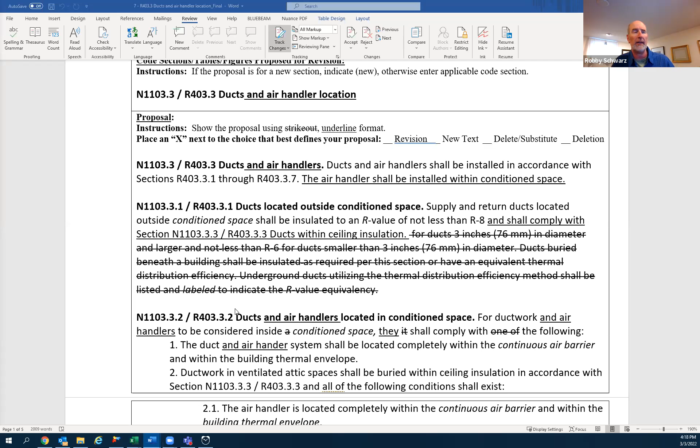There is an exception, in essence, in the current language of the code that allows smaller size ductwork to be insulated to an R6 versus an R8. That exception has been removed. The majority of the ductwork that's installed for HVAC systems is greater than 3 inches, and there is R8 duct available out there if you were to be using it outside the conditioned space. There currently is a need to understand how you in essence claim that a duct is located inside the conditioned space. So this next section is dealing with ducts and air handlers located in conditioned space and how you define that. And so it adds the air handler as being part of that requirement to be located in conditioned space to improve the efficiency of the system itself.

The next sections of the code deal with duct installation, and that would be ducts located within ceiling insulation. There's some additional areas here to clarify that if you're going to install in this way, the duct needs to be located down on that bottom chord of the truss, or if it's in a joist system, in such a way that the duct is actually within the insulation itself to get better performance of that duct, and less loss either on the heating side or the cooling side when air is moving through that system.

And then lastly, the effective R value of deeply buried ducts. We don't see deeply buried ducts here very often, but when it is used, it's used primarily for the performance pathways, and you have to be able to assign an R value to that duct system that's in the attic. And that's what this section does, and it brings in the reference to the energy rating index pathway, as well as the total building performance pathway, which was there before.

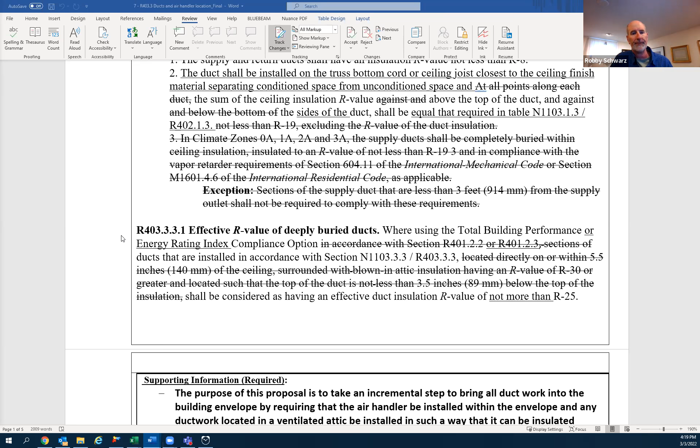Thank you, Robby, for the summary. We will go to the general public. Anybody from the general public that wants to speak in support of this, please raise your hand. I see one. Mike, you should be allowed to talk. Mike, please introduce yourself, and you'll have 2 minutes.

Hi, Mike Fulton, Western Mechanical Solutions. I would like to say that I would agree with this. The one question I have for Robby would be, the commercial code actually requires R12 in our climate zone for exposed ductwork. And I'm curious why you would propose only R8. I get that it's better than what's there, but it would seem that you would have more potential in a residential application to save energy as compared to a commercial where, you know, a package rooftop would be off a considerable amount of time and not have that standby loss. So that's my question. Or suggestion, I guess, is to increase it to R12.

Yeah. So R8 flex duct is primarily what's used in these situations when a duct is located in a ventilated attic, for example. It's readily available. It's what is currently in the language of the IECC. And there wasn't a recommendation or a proposal to change it, because it's common in the market primarily. Could it be changed? I think it could potentially be changed. I don't know offhand in the residential sector how available any ductwork that's higher than R8 is.

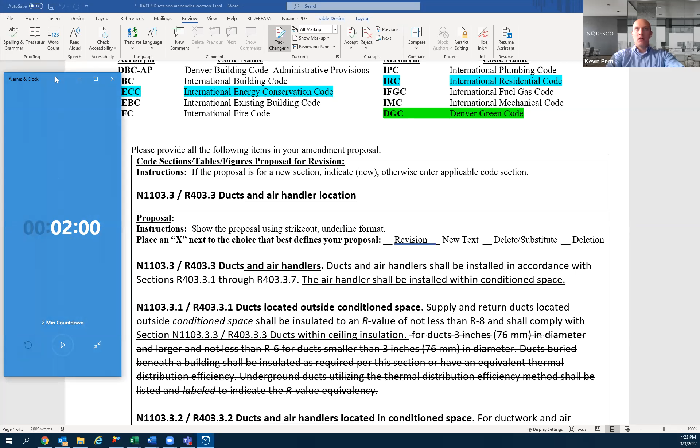Okay. Anybody else from the general public that wants to speak in support of this, please raise your hand. Third and final call, anybody from the general public that wants to speak in support? All right, moving to opposition. Anybody from the general public that wants to speak in opposition of this, please raise your hand. Third and final call, anybody that wants to speak in opposition of this, please raise your hand. Okay, seeing none, I'll turn it back over to the committee. Committee, this is your time for questions and questions only.

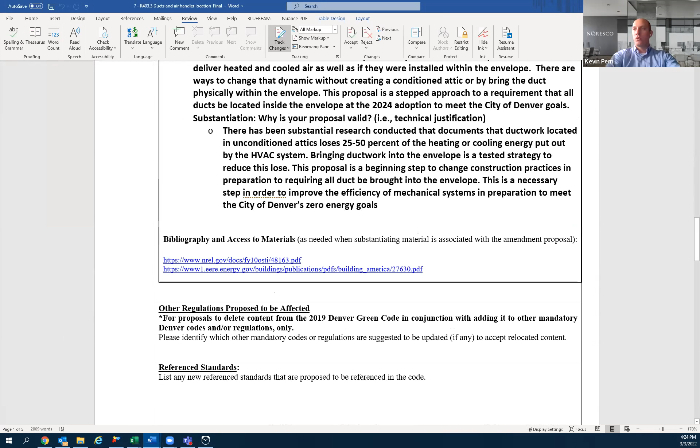Courtney, you're probably going to ask your question here, so go ahead and ask what you want to ask. I'm not trying to throw anything off track, but Eric and Kevin, I'm curious if we can incorporate discussing the Denver Green Code version of this proposal, so we don't have all the back and forth, and we can be efficient on that. I defer to both of you. Yeah, I'm fine with that, Eric. I don't know if there's another proposal number that I can bring up here quickly, or if it's, I don't think it's within this one. It's at the bottom. Okay, cool. There we go. So would Robby also be talking on this one too? Yes. Okay, go ahead, Robby.

So this is Robby again. The primary difference between the first proposal for the IECC and the second for the Denver Green Code is in that first section R403.3, which is requiring that both the duct and the air handler be installed within the conditioned space of the house. There's significant data out there that demonstrates that the overall performance of the HVAC system is improved when the entirety of the system is within conditioned space. Not only from an efficiency perspective, but from a duct leakage perspective, this is proven to be true.

The rest of the proposal really follows the IECC proposal. It gives some other options for how to install the duct. So if you were to install it in the attic, for example, you could install a closed-cell foam over the top of the duct and bring it into the conditioned space in that way. So there is some flexibility that's there to keep the duct in the attic location, but to install it in such a way that it will perform as if it's inside the conditioned space of the house.

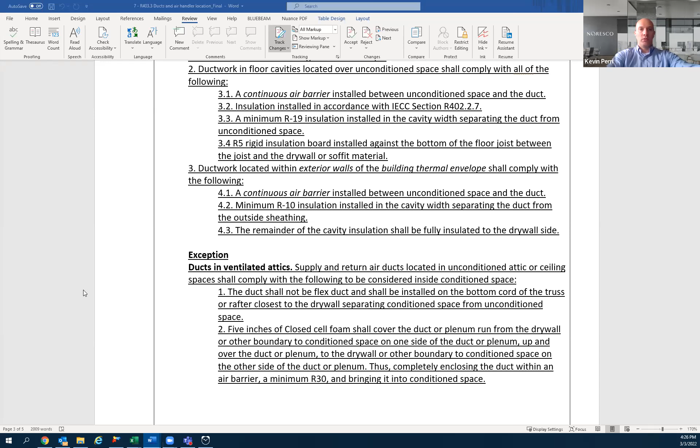Okay, thanks, Robby. So what we'll do is we'll go back to the general public for anybody that wants to speak in support or opposition of the Denver Green Code one, and then we'll come back to the committee. That's what we'll do to hear both of these at the same time. So general public, anybody that wants to speak in support of this Denver Green Code proposal, please raise your hand. Third and final call. Seeing none, I'll go to opposition.

Anybody from the general public that wants to speak in opposition of this, please raise your hand. Third and final call, anybody that wants to speak in opposition, please raise your hand. Okay, seeing none, committee, back to you. We will open it back up to questions on either one of these. Questions only at this time. Okay, last call for questions on either one of these proposals in the committee.

Seeing none, we'll go to the next section, which, since we did have somebody speak in support on the first one, we have to allow the general public to speak in support again as a rebuttal. Anybody from the general public that wants to have a rebuttal, please raise your hand. Third and final call. Okay, seeing none, back to the committee. Committee, this is your time to have discussion, make a motion, or make a modification, anything of that nature on either one of these proposals.

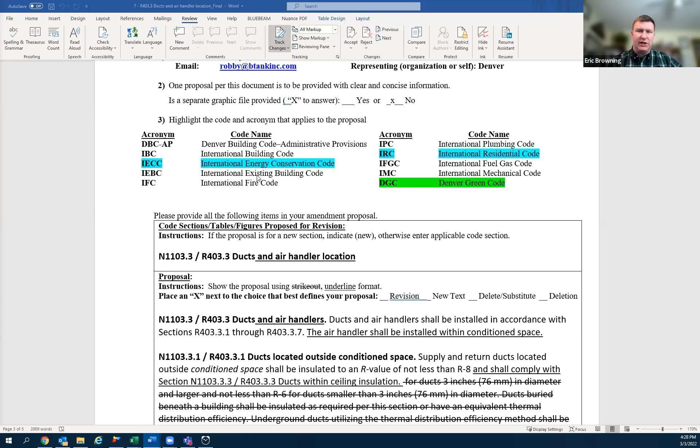Eric? Actually, point of order, Mr. Moderator, are we voting on only the energy code amendment, or are we voting on energy and green code simultaneously? Sure, we would be voting on both, but since Ken made the motion, Ken, can you clarify, would your motion be to vote on both of these, or would you like them split up? Let's vote on both of them. Okay, great. So there's a motion to approve both of these. Is there a second? I'll second it. This is Paul. Okay, and there's a second. Any discussion? Nope, seeing none. I'll call a vote.

All those in favor of approving both amendments as written, please raise your hand. Sorry, both proposals as written. I think I said amendment. Hands are still moving. All right, I see 16. Go ahead and lower your hands. All those opposed, please raise your hand. I got one. All those abstaining, please raise your hand. We have 4. Okay, go ahead and lower your hands. So this one passes 16 to 1 to 4. And we'll move to the next one.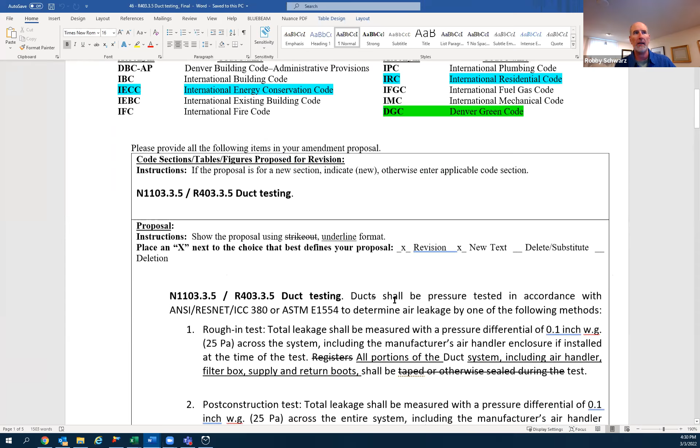Okay, next item is item 46, duct testing. Go ahead, Robby. Yeah. This proposal is again seeking to incrementally improve the performance of the HVAC system to better meet the City of Denver goals. This proposal also has an IECC portion and a Denver Green Code portion, so we'll talk through both. The way the duct testing section is written in IECC, there's charging language that basically says you have to test the system, and then there's a performance target created in the next section.

What this first part is doing is saying that you have to test it, and the proposed additional language is trying to ensure we have a common understanding of what the duct system is. The duct system doesn't just include the duct, it includes the air handler, the filter box, the supply and return boots. When you're doing these tests with the HVAC contractor, you often get into an argument about what constitutes the duct system and what can be taped off to pressurize the system to determine how leaky it is. So we want to be crystal clear that the entirety of the system is being tested, and that way we're going to get better

systems overall. The next section gets into the targets, or the allowable leakage allowed by the code. That didn't change. This just moved some things around to make it more clear where the exceptions apply, and that some of the exceptions apply both if you're testing at a rough stage or at a final or post-construction stage, and some of the exceptions just apply to the rough stage of construction.

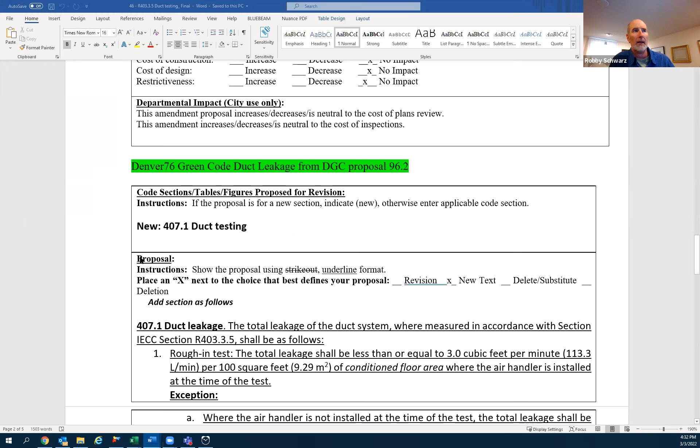So that's really the issue for the IECC. If we move into the Denver Green Code, this section primarily deals with the actual duct leakage targets. In the IECC, it's 4 CFM of leakage per 100 square feet of conditioned floor area that's allowed. What's being proposed in the Denver Green Code is that be lowered to 3 CFM, or 3 cubic feet of air per minute per 100 square feet of floor area, so that we're getting tighter ducts, better delivery, and better efficiency in the Denver Green Code by making that change. There are some similar exceptions in this code as well.

Okay, thank you, Robby, for the summary. I will open up to the general public. Anybody from the general public that wants to speak in support of either one of these, please raise your hand. Third and final call, anybody from the general public that wants to speak in support, please raise your hand. Seeing none, I'll go to opposition.

Anybody from the general public that wants to speak in opposition of either one of these, please raise your hand. Third and final call, anybody from the general public that wants to speak in opposition, please raise your hand. Seeing none, I turn it back over to you, committee, for questions. Anybody that has questions on either one of these, please raise your hand. Anybody from the committee have any questions? Allen, go ahead.

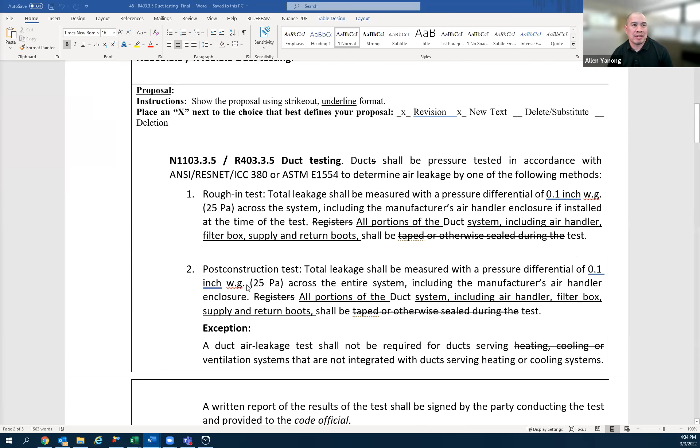So on the first, where it says rough-in test, right at the beginning, the revision reads all portions of the duct system, including air handler, filter box, supply, return boots, shall be test. That sounds odd to me; there has to be some revision in there. It should be tested, yeah. Shall be tested, I think is what you meant. And that should carry on to number 2 as well. Thank you. Eric, what's your question?

Thank you. The amendment in the same two top sections removes the language that indicates registers shall be taped or otherwise sealed. It seems like that language should be maintained. I apologize if I'm misunderstanding something, but the question to Robby is, don't we need to tape these registers to do the tests?

Yeah. So the 2021 added testing in accordance with ANSI/RESNET/ICC 380 and the ASTM test as well. So you can choose your testing methodology, and within those standards, it clearly describes the preparation you need to do for the test, which includes taping off and sealing the registers. So that's why that was removed. Okay, as a follow-up, does the standard not also clarify that the test is not exclusive to the ducts, that it's for the system? Not explicitly. Okay, thank you.

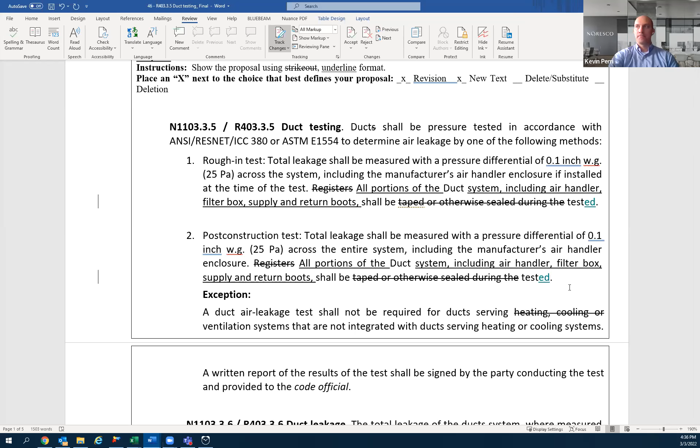Any other questions from the committee? Seeing none, we'll go to the next portion. Sorry, Chuck, you got a question? Yeah, Robby, can you expand on the exception for 1,200 square feet of conditioned floor area or less, and why that's needed? Yes. Let me get a calculator here real quick.

If you take 12 times 4, you get 48 CFM of allowable leakage in a unit that's 1,200 square feet. If you have a 500 square foot unit, for example, 5 times 4 gets 20 CFM of allowable leakage. It gets really hard to seal a system that tight. So there needs to be some allowance for smaller dwelling units when you're using a CFM per 100 square foot compliance metric.

All right, we will open it up to any other discussions or motions then. Anybody on the committee have any further questions, comments, motions?

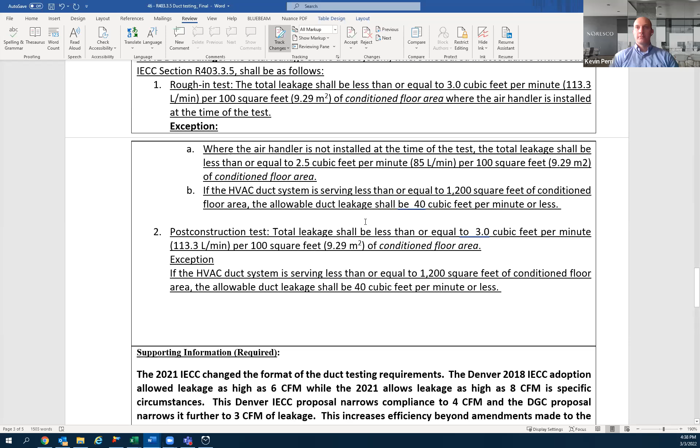Nobody? Eric, go ahead. Right, sorry. Robby, in your proposal, you are taking the language that was in the body of the section that we're looking at here and created two separate exceptions, A and B. Can you explain why? Why not just leave A in the body of the language and then just create one exception B?

So the language that's in the existing code is an exception, but it wasn't depicted as an exception. So to be consistent with the way that the code is generally written, it appeared to make sense to break it out as a true exception. Thank you.

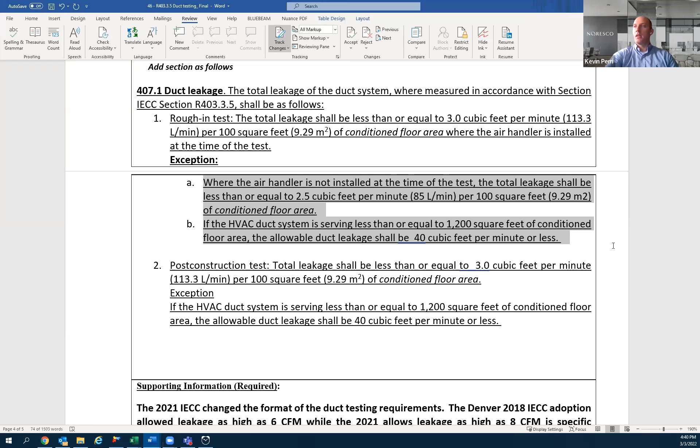Okay, any other discussion? Someone feel free to make a motion if you would like. Eric, go ahead. I'll move to approve as submitted with the acknowledgement of the editorial change to tested. Okay, and is your motion for both the IECC and the DGC? Yes. Apologies, for both IECC and DGC. Okay, great. Is there a second? Courtney. Second. Great.

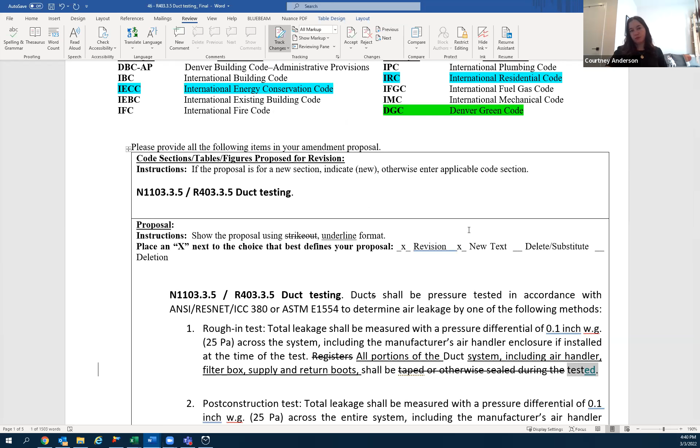Any discussion? Seeing none, I will call a vote. We are voting on approving this proposal, both of the IECC and the DGC, with just those editorial changes, instead of being test, it's tested. All those in favor, please raise your hand. You'll see some hands moving. All right, I have 16. Go ahead and lower your hand. And I'm going to lower your hands for you. Okay, all those opposed, please raise your hand. And all those abstaining, please raise your hand. I see 4. Okay, both of these pass 16 to 0 to 4.

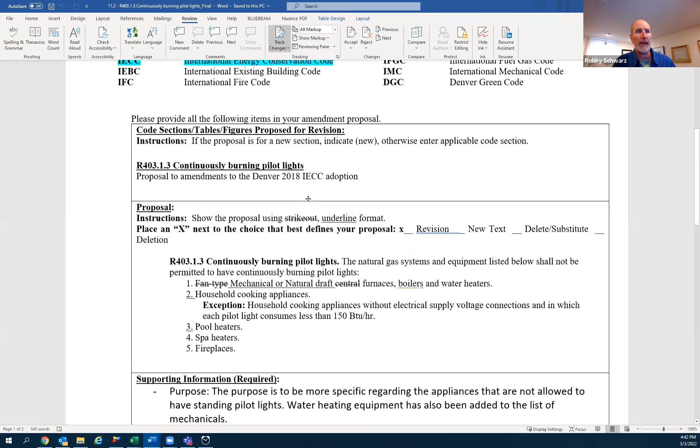All right, next up, let me pull up the agenda. We have 11.2. Robby, that is yours. Go ahead, and I'll pull that up for you. So the benefit of this proposal is twofold. One is to increase the efficiency of mechanical equipment that is being brought into the structure, and the second is really a health safety issue. So this proposal is saying that any atmospherically vented equipment cannot be installed in a new residential building or dwelling unit in Denver. And by doing that, we are in essence getting rid of combustion safety issues and also increasing the efficiency of the units that are being installed.

Okay, thank you. I'll move to questions from the general public, or sorry, all those in favor. Oh man, I am flipping up there. Anybody from the general public that wants to speak in support of this proposal, please raise your hand. None. I will go to opposition. Anybody from the general public that wants to speak in opposition, please raise your hand. Third and final call. Seeing none, I'll go back to the committee for questions. Any committee members that have questions, now's your time to ask.

Eric, you're up first. Thank you, Mr. Moderator. Robbie, I'm curious with respect to non-continuously burning pilot lit water heaters, just from a conventional system perspective, how available are these, and at what price premium? Definitely, I have a concern there about not being able to source them and the cost difference.

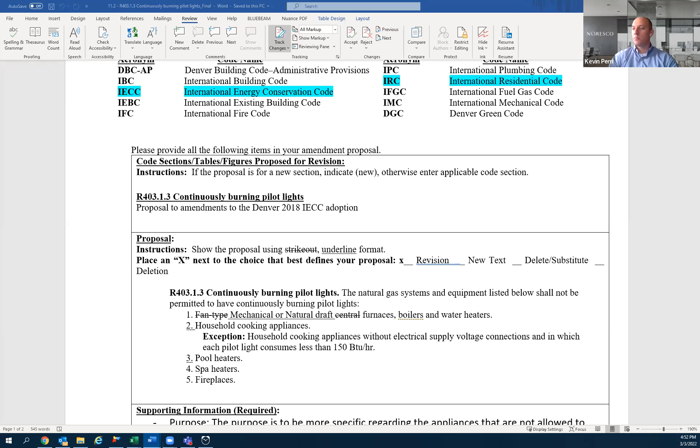All those in favor of approving this proposal, please raise your hand. All right, we see some hands moving. Still moving. Okay, we have 11. Go ahead and lower your hands. And all those not in favor, please raise your hand. One, go ahead and lower your hands. All those abstaining, please raise your hand. I see 8. Okay, so this does pass 11 to 1 to 8. Go ahead and lower your hands.

Okay, next up, we have a little bit of time, so let's go ahead and get into it. Item number 45. Robby, go ahead. Yeah. So the primary intent of this proposal is to clean up the confusing language that got into the 2021 IECC. The bulk of that confusion happens with this new section R402.4.1.2 testing that was added to the 2021 IECC. This language is intended specifically to address the building performance pathway and the energy rating index pathway and set a maximum level of air leakage that you can't trade off beyond.

However, it doesn't specifically say that that's what it's for. So a lot of people interpret it that the air leakage rate of 3 air changes per hour that's been in the code since the 2012 IECC was relaxed to 5 air changes. If you scroll down to what I struck out here at R402.4.1.3 leakage rate, this is where the climate zone specific leakage rate is addressed. So in Denver, we want to keep the 3 air changes requirement. So I struck out this climate zone specific area, and I used the charging language in testing to establish that leakage rate there, so that it's understood that in Denver there's just one leakage rate.

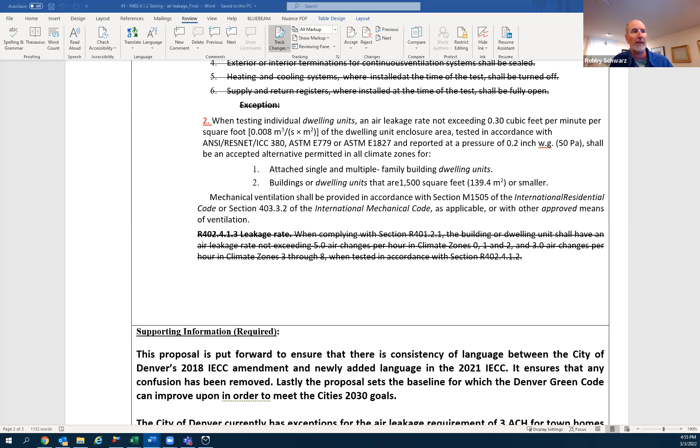And so the exception for attached heated private garages was taken out, and the other test or the other section became an exception. So the way it was set up before, in essence, you add an exception to the exception. Now you just have 2 exceptions that are in the code. So a lot of this was just cleaning up the language so that it makes more sense for our specific situation here in Denver.

Okay, thanks, Robby. Just a point of order real quick. Charlie, if we drop below 20 members, we no longer meet quorum. So keep that in mind when we're going through with this real quick.

All right, so general public, anybody that wants to speak in support of this proposal, please raise your hand. Third and final call, anybody from the general public that wants to speak in support of this, please raise your hand. Seeing none, I'll go to opposition. Anybody from the general public that wants to speak in opposition, please raise your hand. Third and final call, anybody from the general public wants to speak in opposition? Seeing none, I'll go back to the committee.

Chuck, before we get started, I see your hand's up. I don't know if you had something you wanted to add. Okay, good. Anybody from the committee that has any questions, please raise your hand. Jeff, go ahead.

Yeah, so similar to the duct leakage question, can you kind of expound on why in the during testing part you got rid of the guidance on how you set up the building? I know you're referencing E1827, ICC 380, RESNET, whatever you want to call it, but those standards have different guidelines in them, like how the building should be set up. It's not like they're very specific.

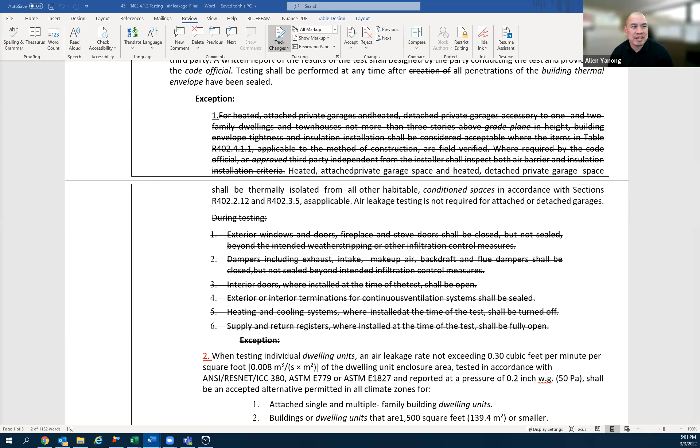Okay, next question comes from Allen. Hey, Robby. So when you go to number 2, when testing individual dwelling units, and you have the permitted in all climate zones, so we have a 1 and 2, and they differ slightly from what is in our current amendments. So I think attached single and multiple family perhaps indicates townhouses. In our amendments, it's clearly written as attached 1 and 2 family dwelling units and townhouses. So I don't know if there's a clarification there.

I mean, often we hear multiple family on the commercial side, it takes you out of the IRC and our minds go to the IBC. So I don't know if that's quite an issue, but it's different from what's in our current amendments. And then for number 2, the square footage in our amendments is listed as 1,000 square feet or smaller. Here we're back up to 1,500. So in my mind, that's less restrictive than what we currently require.

And then our amendments have a third category for RX occupancies built in accordance with the IBC section 429, City County of Denver. So I don't know if that was intended to be deleted or if that should be included back into this. And just for my clarification, RX would be like the accessory dwelling unit? Yeah, so I think we allow certain IBC occupancies to use the IRC. So like R3 care facilities or R4 assisted living?